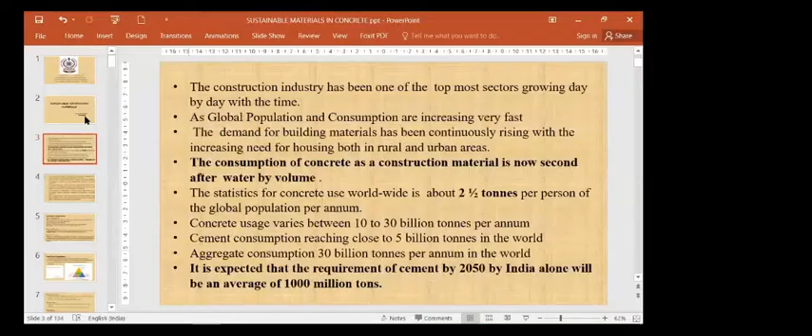As it is a very vast material, to discuss this we need a lot of time, because we cannot brief it out in 1.5 hours. So anyhow, I have tried to compromise the materials with few materials where I can just bring out the experimental data conducted in our college and outside also. So with the support of the experimental data, I'll be explaining the utility of these materials.

So the construction industry, all of us know, is one of the sectors growing day by day, and the global population and consumption is also increasing along with the construction. As the construction industry is growing, population consumption is also increasing. So demand for the materials definitely will be higher. So the demand for building materials has been continuously rising. Construction material now has occupied second place after water by volume.

The statistics for concrete is 2.5 tons per annum as per the global population. Then concrete usage is 10 to 30 billion tons per annum. And cement consumption is 5 billion tons in the world. And aggregate consumption is 30 billion tons per annum in the world. So by 2050, it is estimated that India alone requires 1,000 million tons of cement, which is a very huge requirement.

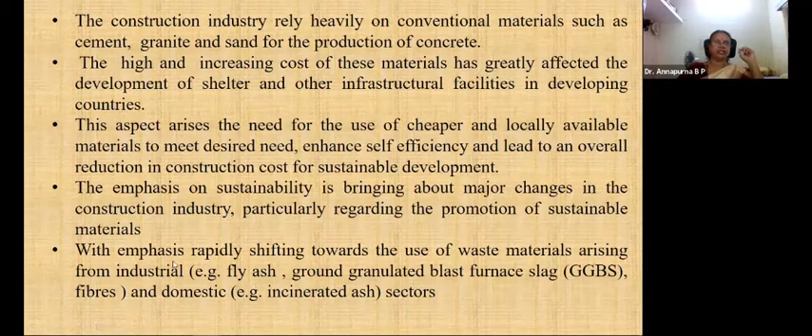The emphasis on sustainability is bringing about major changes in the construction industry, particularly regarding the promotion of sustainable materials. So importance is given towards the use of waste materials arising from the industries and domestic sectors, like fly ash, ground granulated blast furnace slag, or fibers, or incinerated ashes like rice husk ash or bagasse ash, or many other types of ashes like bamboo ash. So I'll be discussing few of these materials in the coming lectures.

Next, definition of sustainability. Many of us have already discussed the definition of sustainability, so here also I am discussing a few of them. Sustainable development is development that meets the needs of present without compromising the ability of future generations to meet their own needs. So there should be some materials left for the future generations also. And manage economic growth in such a way as not to do irreparable damage to environment.

Sustainable construction: creating and operating a healthy built environment based on resource efficiency and ecological design. Coming over to the materials used throughout our consumer and industrial economy that can be produced in required volumes without depleting non-renewable resources and without disrupting the established steady-state equilibrium of the environment and key natural resource systems.

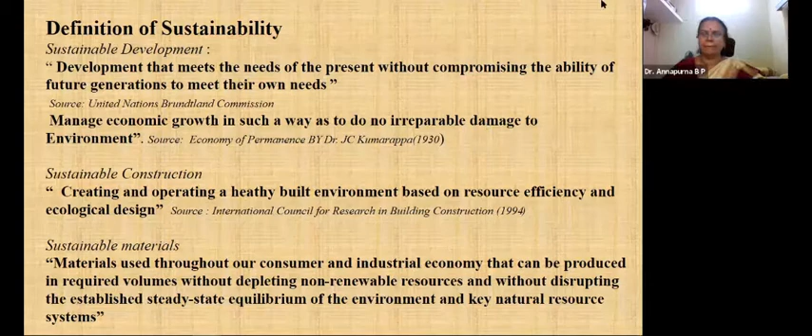Now, the three pillars of sustainability. Many have discussed these pillars of sustainability. Sustainability is dependent on these pillars: environment, economy, and society. This can also be discussed as 3P, that's planet, people, profit. Planet refers to environment, people refers to society, profit refers to economy. And it can also be said as the 3 E's: environment, equity, and economy.

Now, environmental impact. Cement manufacturing accounts for about 5% of carbon dioxide emission in the world. This attributes to 1/20th part of carbon dioxide emission of the world. So increase in carbon dioxide leads to global warming and climatic change, which is the environmental effect which has to be addressed.

Then, economic impact. Construction provides livelihood to a large extent of the population, next to agriculture. Poor construction with concrete can lead to high repair and rehabilitation cost. So construction gives employment to many people, and also when the construction is very poor, for repair and rehabilitation we have to spend a lot on that. So we have to take care of both the things.

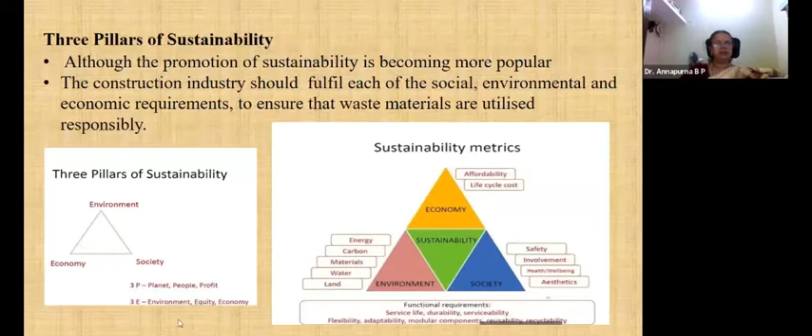Now, sustainable construction materials. The list of sustainable construction materials that can be aimed at the concrete industry has increased noticeably. This will continue as the pressure increases on the construction industry to reduce its carbon footprint. It is estimated that at present there are 10 to 20 billion tons of waste that can be potentially processed for use. Some of the sustainable alternative materials in concrete are alternative materials to cement.

We can use fly ash, rice husk ash, bagasse ash, bamboo ash, banana ash, and many other ashes. Most of the agricultural waste ashes are being used, and material research is going on for alternate materials to cement.

And materials to replace aggregate: we know that slag, iron ore tailings, and waste metal from windmills can also be used as replacement for the aggregate. Then recycled aggregate, copper slag, waste glass aggregates, and waste plastic aggregates. Coffee seed husk is also being used, and research on this is going on.

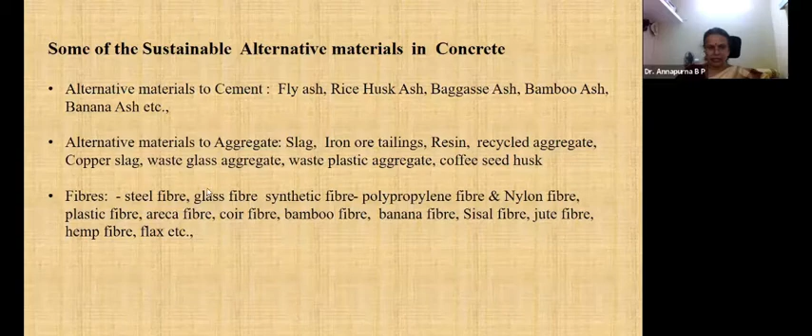Then fibers: steel fiber, glass fiber, synthetic fiber, polypropylene fiber, nylon fiber, plastic, areca, coir fiber, bamboo fiber, banana, sisal, jute fiber, hemp fiber, flax, etc. These are the fibers which we use. These fibers will increase the flexural strength or the crack arresting in the concrete.

Then alternative materials to aggregates. Now let us discuss some of the alternative materials to aggregates. For this, we have the preparation of a mineral planning. We have to have a mineral planning policy in line with the advanced countries. Mineral planning is essential for a judicious use of natural resources.

The government of the UK, after consultation with industry and other interested bodies, published the aim for the aggregate industry as Minerals Planning Guidance 6. The guide outlines the general policy and guidance to mineral planning authorities and operators on how to ensure a steady and adequate supply of aggregates, both coarse and fine, keeping in mind environmental and socio-economic considerations. The objectives of sustainable development of mineral planning for England are set as follows.

To conserve minerals as far as possible, whilst ensuring an adequate supply to meet the needs of society for minerals; to minimize production of waste and to encourage efficient use of materials, including appropriate use of high quality materials and recycling of waste; to encourage sensitive working practices during mineral extraction, and to preserve or enhance the overall quality of the environment once extraction has ceased.

Then to protect areas of designated landscape or nature conservation from development, other than in exceptional circumstances where it has been demonstrated the development is in the public interest.

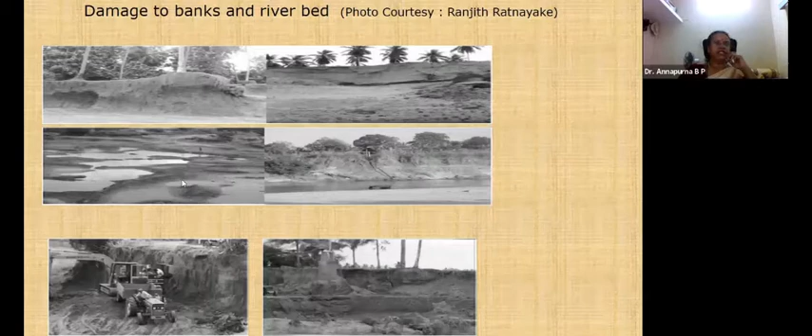So now, alternative to river sand. As there is a huge demand for sand in construction, the river sand resources are depleting. So the illegal mining of natural resources is creating a major problem, and environmentalists are protesting against mining of these natural resources, not only in India, but all over the world.

The regulating authorities, such as the National Green Tribunal, Ministry of Environment and Forest, the State Environment Impact Assessment Authority, and the pollution control boards, etc., are restraining sand mining without any license or permit or environmental clearance from the riverbeds across the country.

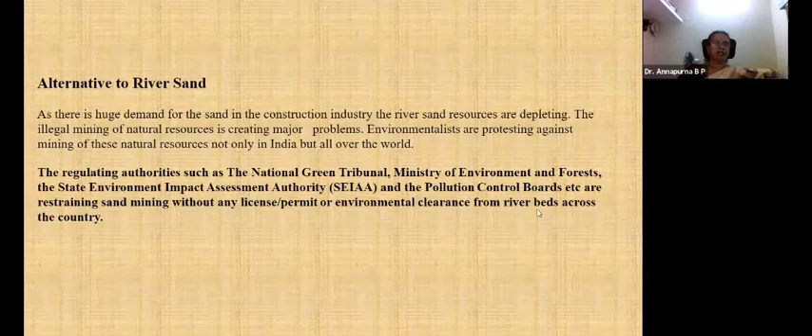Now, river sand substitutes. There are many materials which can be substituted for river sand: processed rock fines, offshore sand, dune sand, wash soil, fly ash, iron ore tailings, slag sand, copper slag, construction demolition waste, powdered glass, aluminum, sawmill waste. Then manufactured sand. Comparison between river sand.

Now let us start with the different sand. The manufactured sand. Now all of us are using M sand, so that is manufactured sand. So let us just see the comparison between river sand, manufactured sand, crushed rock fines, and washed crushed rock fines. So the manufactured sand is the one which is produced in the crusher, the controlled

inspections. But the crushed rock fines are the rock which is being crushed, and washed crushed rock fines are crushed rock fines again washed by water so that the fines will be removed, and it will be better than the crushed rock fines. It is nearing the manufactured sand, but it is not as good as manufactured sand. So manufactured sand is produced by feeding stones of varying sizes into a vertical shaft impactor.

The machine is shown here. There are many other types of machine. This is a vertical shaft, in which the rocks are fed from the top, and then crushed. So the VSI crusher, by means of its unique design and action, produces well-shaped fine aggregate particles. The process of attrition also enables the removal of surface roughness of the fine aggregate particles to a good extent.

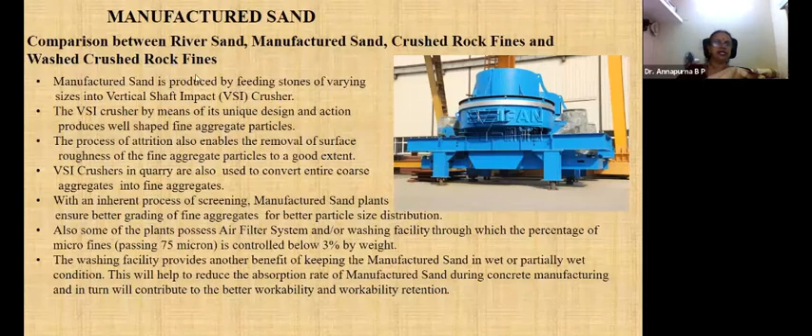Now this is the sieve analysis distribution of the fine aggregate. The first one shows the river sand, from the maximum for zone 2. So this is the maximum here. Okay, so now this is the sieve aggregate size distribution, percentage passing, for the river sand. The first figure shows river sand, and the second is the manufactured sand.

So the manufactured sand lies between these two zone 2 limits of the river sand. The distribution is very uniform, and here the fines and the larger size aggregates are balanced. But when we come to the crusher dust sample, we can see that the finer materials are higher than the zone 2 sand, and because of this the strength of the concrete reduces, because the larger size aggregates are fewer than the finer size aggregates.

So the crushed washed rock dust: by washing this, the finer aggregates can be lessened compared to the crushed rock dust. See the curve. The percent of finer aggregates is more here. By washing it, you can remove the finer aggregates to a certain extent.

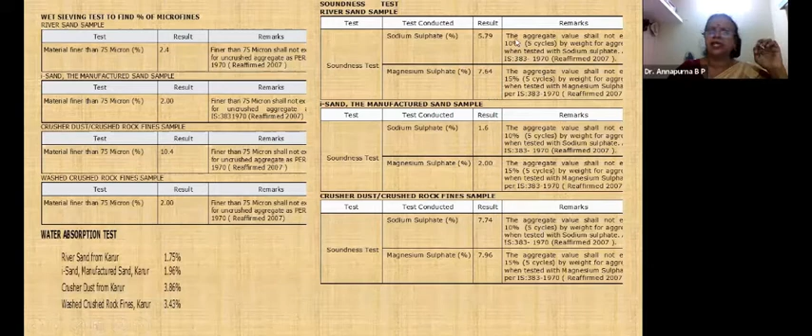This is the soundness test. When the sample is reacted with sodium sulfate or magnesium sulfate, the aggregate value should not exceed 10%. Here for river sand it is 5.79 and 7.64. For manufactured sand it is 1.6 and 2, which is lesser than the river sand.

The crusher dust or crushed rock dust fines has 7.74 and 7.96, because the dust contains more silt and it is not taken care of. So the manufactured sand has the least effect due to sodium sulfate and magnesium sulfate. All these fines are within the 10% aggregate value, but the better quality is the manufactured sand, which has the least. Now, water absorption.

River sand water absorption test: it is observed that it is 1.75% water absorption. Manufactured sand is 1.96%, crushed rock dust is 3.86, and washed crushed rock is 3.43%. These materials, river sand, manufactured sand, crushed dust, everything is taken from the Karur area. So this is the water absorption test.

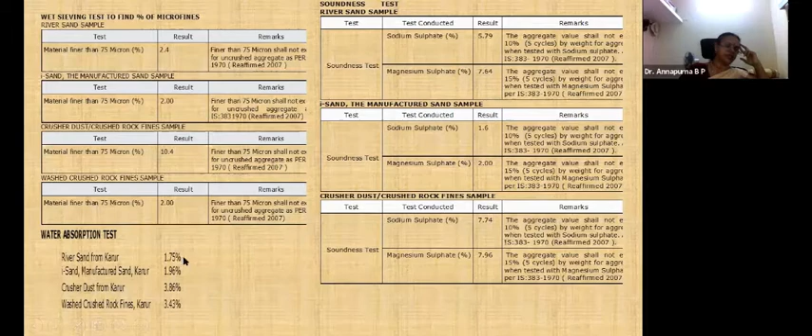According to the IS code limit, it should be less than 2%, whereas the water absorption for crushed dust and washed crushed dust is greater than 2%. Now coming to expansion, this is the ASR reaction, the time of immersion in sodium hydroxide. This is the expansion of the river sand and the manufactured sand. On immersion in sodium hydroxide, the river sand shows a higher expansion, whereas the manufactured sand shows the least expansion.

If aggregates contain reactive silica, it can react with alkali in cement during hydration and result in formation of alkali silica gel. This gel imbibes water from concrete and expands. The expansion causes disruption in concrete and makes it disintegrate or crack. Next is the accelerated mortar bar test, which we call the ASR test, one of the test methods according to the codal provision.

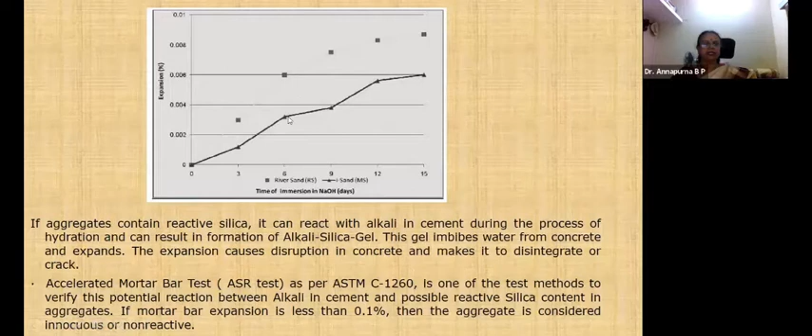This should be less than 0.1%, then the aggregate is considered non-reactive. Here both tests are less than 0.1%. Though it is less than 0.1%, the reaction on the M sand is less than the river sand. Now this is the comparison on workability and strength: river sand, M sand, crushed rock dust powder, and washed crushed rock.

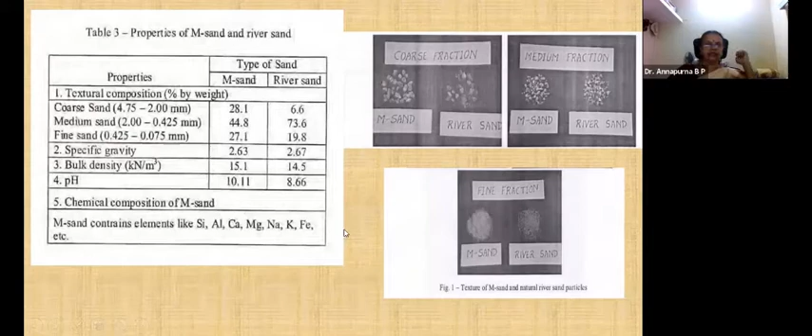And now coming over to the grain size distribution of both the M sand and river sand put together, we can just see here. These are the zones, and this is the river sand and M sand. So both lie within zone 2, but the distribution of fiber is better in M sand compared to the river sand.

And here, compressive stress: this is the stress versus strain graph. So this is for M sand and this is for river sand. So compared to the river sand, M sand has lesser strain and high strength. And the strength is similar to a high strength concrete.

The modulus of elasticity of masonry with M sand is double that of the modulus of masonry with river sand. So when we compare the modulus of masonry with M sand and with river sand, the modulus of masonry with M sand is double that of the river sand. The increase in modulus can be attributed to better bond between the mortar and the brick.

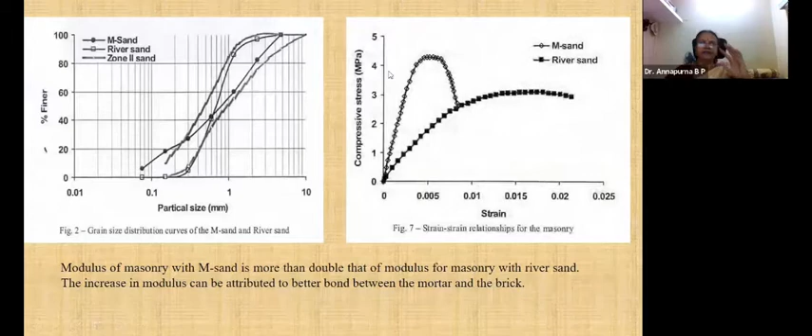Now, what is water retentivity? Water retentivity can be defined as the ability of the mortar to retain water against the suction of the brick or block. Mortar is a cementitious material, thus initially it requires a certain amount of water for the hydration process and development of strength. If the water loss from the mortar is large, this leads to a low water cement ratio in the mortar and improper hydration of the fresh mortar, thereby affecting the mortar characteristics and the bond development.

So we need to have a certain water retained in the mortar to have proper hydration in the fresh mortar. Otherwise the mortar gets dried and the strength reduces. Water retentivity values for 1:6 cement mortar using river sand and M sand are 27.3% and 28.5%. For 1:4 mortar, it is observed that it is 25.6% for M sand and 35.6% for river sand. Thus, water retentivity of mortar improves the workability of the M sand, and in turn increases the strength and bond development.

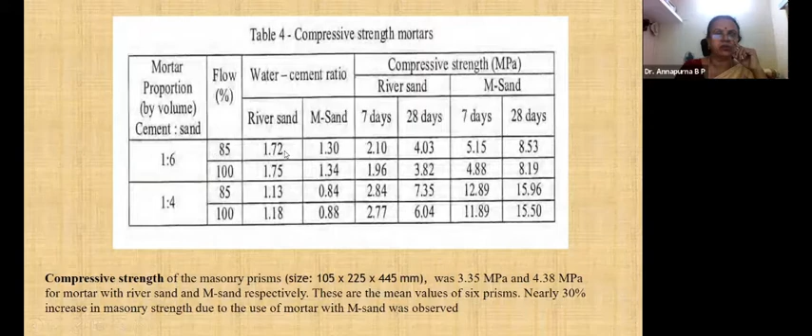Then, compressive strength of mortars. This is the strength of mortars which we have studied. For 1:6 and 1:4, the percentage flow here is 85 and 100. For river sand, at 85% flow, the water cement ratio is 1.72, whereas for M sand it is 1.3, and for 100% also it is 1.7 and 1.3. From this we can see that the water cement ratio of M sand is lesser than the river sand.

The compressive strength for river sand at 28 days is 4.03, whereas for M sand it is 8.53. And even for 1:4, it is 6.04 and 15.50 for 100% water flow, where the water cement ratio is more. For lesser water cement ratio, it shows a higher strength of 15.96 and 8.53 compared to 4.03 and 7.35 of the river sand. So nearly a 30% increase in masonry strength due to the use of mortar with M sand was observed.

Now let us go to the filtered sand. Filtered sand is where they usually extract the topsoil of the earth and then wash it, because the soil consists of a major amount, like 50 to 60%, of sand. Along with that, it has clay and silt content. So this clay and silt content has to be washed off.

So they extract the soil like this and then wash it with water and retain it. The clay and silt will settle, so you can extract the sand. By washing, the silt and clay content will be washed off, and some amount of clay will be retained, so the major amount of sand can be extracted.

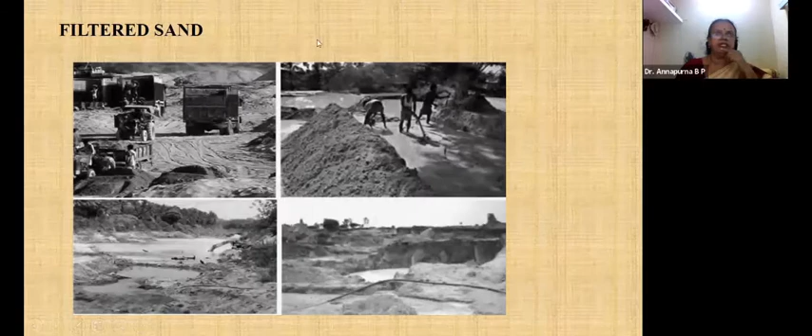The use of filtered sand for construction is increasing because of restrictions on river sand. The methods of extracting filter sand are very crude. It is extracted by manually washing the soil in pits and small ponds to remove the silt, because the natural soil contains 40 to 50% sand, and in some cases 60%.

The procedure is often criticized because it destroys topsoil, leaving ugly pits. But with proper mechanisms, extracting the topsoil can be avoided, because not only does the topsoil consist of this good sand, but the subsoil below the topsoil has an even greater proportion of sand.

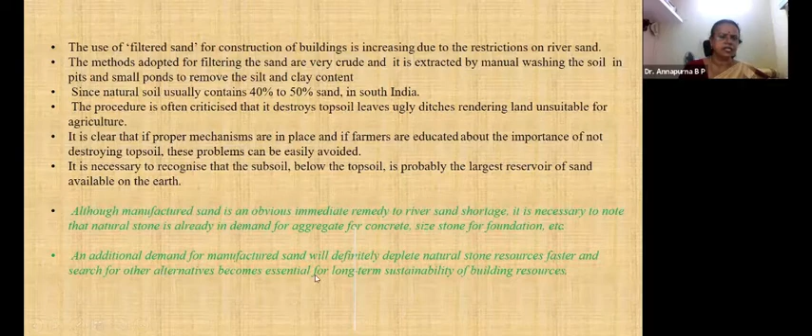Manufactured sand alone cannot be used because it is extracted from aggregate, which comes from natural stone. When natural stones get depleted, we have to go for other sources, so sand extracted from soil can be used. An additional demand for manufactured sand will deplete natural stone resources faster, making the search for alternatives essential for long-term sustainability of building.

Extracting only the topsoil will affect farmlands. So this can be done instead when we dig ponds for water harvesting, canal digging, or digging foundations for high-rise buildings. Wherever we extract soil for these purposes, that soil can be used for the extraction of sand instead of digging the topsoil.

Again, tank beds and dams store a huge quantity of silt, which also contains some amount of sand. So that can also be desilted and then used.

The clay and silt content should not be more than 1% by weight. Material finer than 75 micron should not be more than 3% by weight, so the total deleterious material for uncrushed fine aggregates should be less than 5%. The higher the percentage of clay and silt content in sand, the higher the requirement of cement will be, increasing with the presence of clay and silt content in the sand.

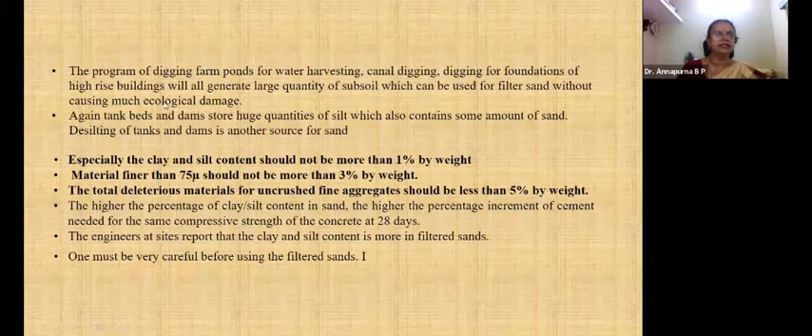Engineers at site report that the clay and silt content is more in filtered sands. One must be very careful before using filtered sands. For this, there is a research result presented here, done by Professor K.S. Chandrashekar from IISc.

This is another study where we have seen that the presence of fines lesser than 75 micron is less than 5%. That is why we are getting a higher compressive strength of the mortar.

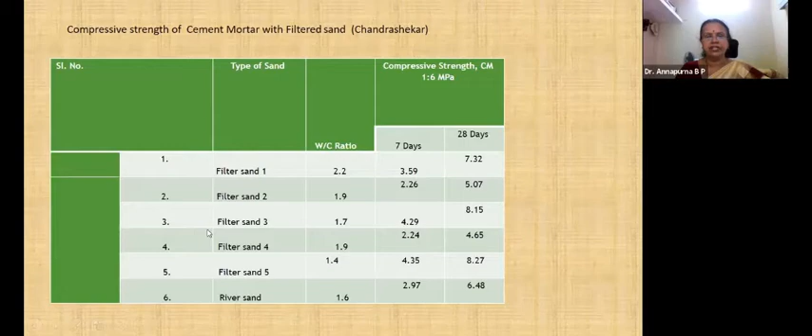But we have conducted another research with student Dhruva, testing mortar and concrete. Here, in this test, the presence of particles lesser than 75 micron size is more than 5%. So let us see the effect on the concrete.

This is the fineness modulus, which is 2.63, and here is the distribution of the aggregates and the test results. We have taken 100% sand and 0% fine filtered sand, and it is being replaced progressively.

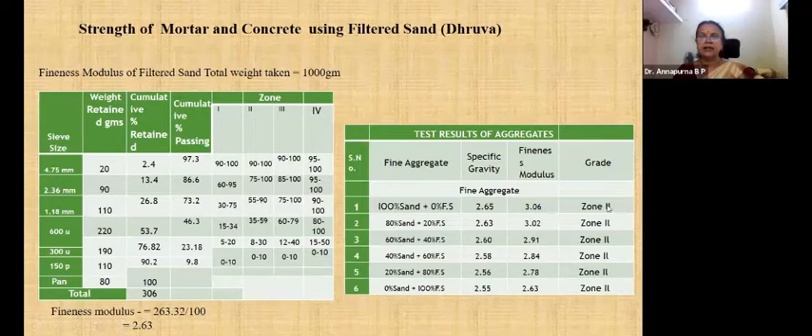The sand mixtures were tested at 80% sand/20% filtered sand, 60%/40%, 40%/60%, and finally 0% sand/100% filtered sand. The specific gravity was found for all these combinations, with 100% natural sand giving 2.65. As the sand is replaced with fine aggregate, the specific gravity reduces, along with the fineness modulus, but all these lie within zone 2.

This is the hydrometer test, done to find out the presence of finer particles in the sand. This was done with the help of Dr. Krishna sir from the Department of Civil Engineering, Bangalore University, who helped us determine the percentage of finer materials.

From this, we observe that the filtered sand contains finer materials greater than 17%, whereas the limit as per IS 383 is 3%, and for natural sand it is 1.02%. This filtered sand value of 17% is much higher than the 3% limit.

Now the compressive strength for mortar. A 1:6 mortar test was conducted, and it was found that for normal sand, the compressive strength was 12.5. With the addition of filter sand at 20, 40, 60, 80 percent, the compressive strength reduced, and for 100% filter sand, the compressive strength of the mortar was 9.1.

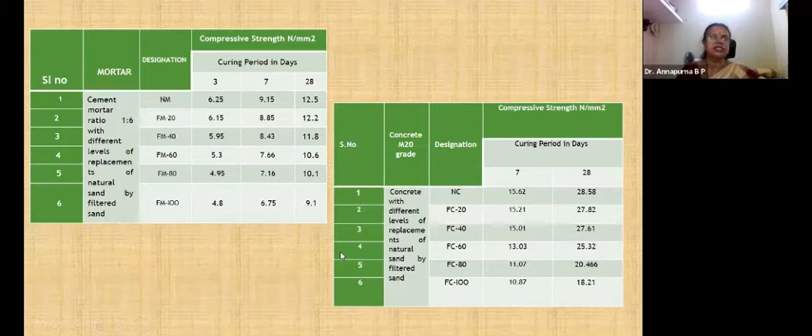Then compressive strength for concrete was tested for M20. For normal concrete, we found 28.58 for the 28-day strength. This reduced when we used filter sand: for 100% it was 18.21, for 20% it was 27.8, and for 40% it was 27.61. This indicates that the finer materials in the filtered sand affect the strength.

Now the pond ash. Pond ash is a byproduct of thermal power plants, considered a waste material whose disposal is a major environmental problem requiring a lot of disposal area. There are three types of ash produced by thermal power plants: fly ash, bottom ash, and pond ash. Fly ash is collected by mechanical and electrostatic precipitators from the flue gases of the power plant.

Bottom ash is collected from the bottom of the boilers. When these two types of ash are mixed together, they are transported in the form of slurry and stored in lagoons, which we call pond ash. Using pond ash as a replacement for aggregates, it is reported that only up to 40% of the sand replacement can be done by pond ash.

This has already been discussed by the previous teachers, so I'm not going to discuss it more here. Now coming over...

To offshore sand and sea sand. In coastal areas, where there are large coastal regions, offshore sand and sea sand extraction and use is in practice. This is how they extract it: they suck the sand from the sea offshore, and then they pile it up.

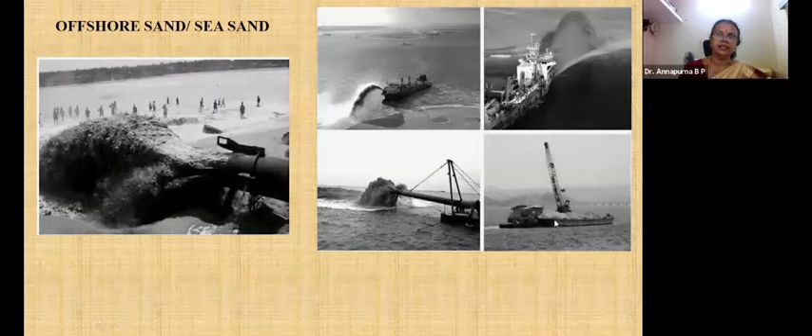They suck the sand, pile it up, and allow it to wash, or wash it if they have ample water available. If they have more water, they can wash it and remove the chloride ions in the sand, since the presence of chloride ions increases corrosion in steel.

Sea sand has a very high shale content and is finer than river sand. Generally, in concrete, coarse sand is more suitable, but river and sea sand have more finer particles. Due to shortage of sand in coastal areas, properly washed and clean sea sand can be used for making concrete, if ample water is available to wash the sand and lower chloride content.

This chloride content can also be reduced by adding fly ash in desired proportions, so that we can balance the chloride ions. This in turn will reduce the corrosion in steel.

Treating sea sand is very costly and requires a large area. As Chan Chi-Ming, head of the Department at the Institute of Vocational Education, says, treating sand is very costly and requires a large area to soak it in fresh water. A professional from Hong Kong says no developer would risk using sea sand if it is not treated well, as the concrete will peel off the building after 10 years.

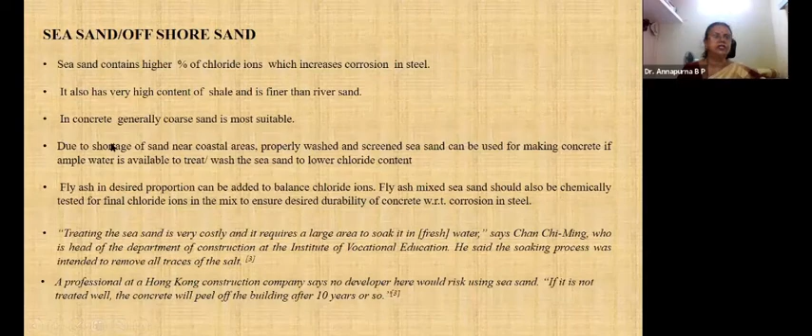The Sri Lanka Land Reclamation Development Corporation Association, the Civil Engineering Department of the University of Moratuwa, and the National Building Research Organization have carried out some studies and recommended sea sand as a sustainable alternative to river sand.

The studies show that the salinity level in the sea sand extracted from the offshore sea is very much less than the sand at the beach. The sand has been pumped from a distance of about 10 kilometers, so the offshore sea will be extracted where it is 10 kilometers from the beach. This contains lesser salinity level compared to the sand at the beach.

This sand will be stockpiled and left, for a period of nearly 8 years, for the monsoonal rains. Due to this, they claim that the salinity has been washed away. By piling the stockpiles and allowing it to expose to the monsoonal rains, they say that the salinity is lost in the sand, so it can be used.

Before recommending sea sand as an alternative, sand samples must be studied in the laboratory to determine the components and fineness modulus of sea sand grains, unit volume of sand, that is how much sand is present, content of mica in the sand, content of dust, mud, clay, volume of foam, sea salt in the sand, and the content of shale in sea sand.

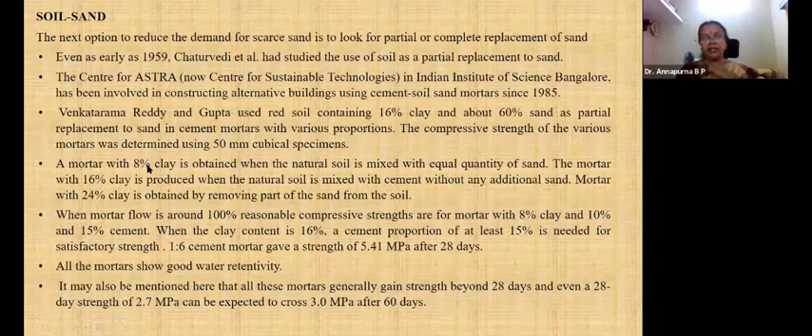For this, they have reduced that clay to 8% from 16% by removing the clay content from the soil and adding the quantity of sand. So they reduced the clay content from 16% to 8% clay by adding additional sand. So this is one specimen they have taken.

The other specimen uses 16% clay itself, where they have not added any additional sand to it. The other one has 24% clay. To make 24% clay present in the sand, they have to remove part of the sand from the soil, so then only they can have 24% clay in the soil. So these are the three specimens they have taken with different percentages of clay.

For this, they have tested the mortar flow, testing for the cement mortar. By having the mortar flow at 100%, the compressive strength for 8% clay was taken, and they have stabilized this, modifying it with 10% and 15% cement added to that, and then that is being used here.

So again, when the clay content is 16%, a 15% cement proportion is needed. So when you have 16% clay, you have to add 15% cement to get a very good strength. So this is the mortar; they have taken 1:6 cement mortar, where they have achieved 5.4 megapascal after 28 days. So all the mortars here showed good water retentivity because of the presence of the finer particles and clay content. It is also mentioned here that all these mortars generally gain strength between 28 days and more than 28 days. So you have to wait for more than 28 days to achieve a greater strength.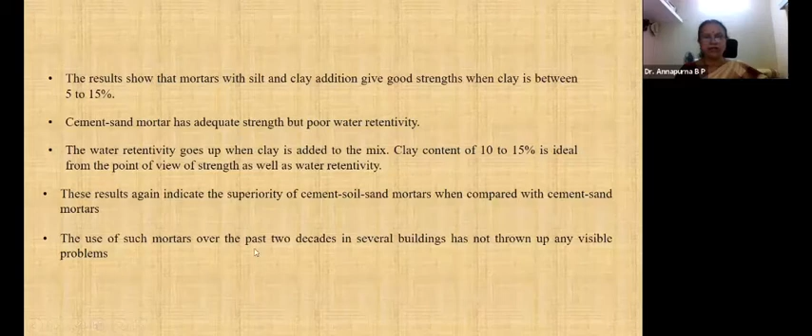Now coming to iron ore tailings as a partial replacement to sand in mortar and concrete. So this is the extraction of iron ore from the iron factory. So factories processing iron ore generally leave behind large quantities of tailings.

This is being disposed in landfills, quarries, ponds and sea as waste. The Kudremukh Iron Company has a storage of 200 million tons of iron ore tailings. This is collected in Lakya Dam in Chikmagalur district, which causes some serious environmental problems. So one way to discard this IOT is to use them in the building industry, where they are recycled and reused for renewable and sustainable product development.

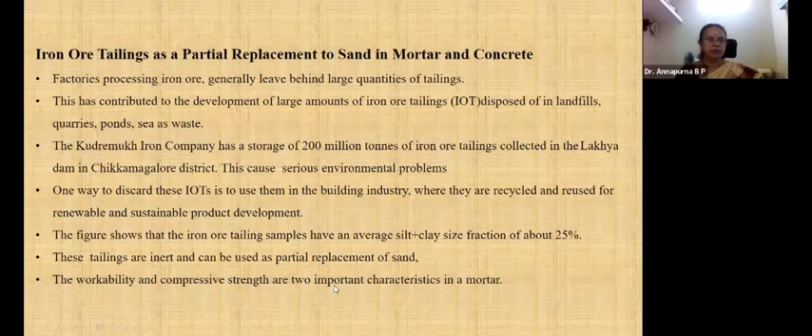The figure shows that the iron ore tailing samples have an average silt clay size fraction of about 25%. These tailings are inert and can be used as a partial replacement. So here, it consists of an average silt plus clay size fraction of about 25%. Then the workability and compression, that we will be checking here.

Now for a test here, they have taken the Kudremukh iron ore tailings mixed with sand in various proportions, tested for flow characteristics. The iron ore tailings with a water binder ratio of 1:1:6. They have taken cement lime mortar. Sand replacement of 25% and 50% shows a satisfactory flow, and the composition for cement lime was determined for a

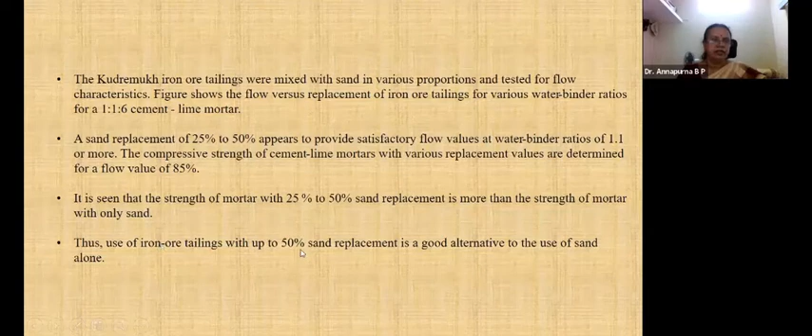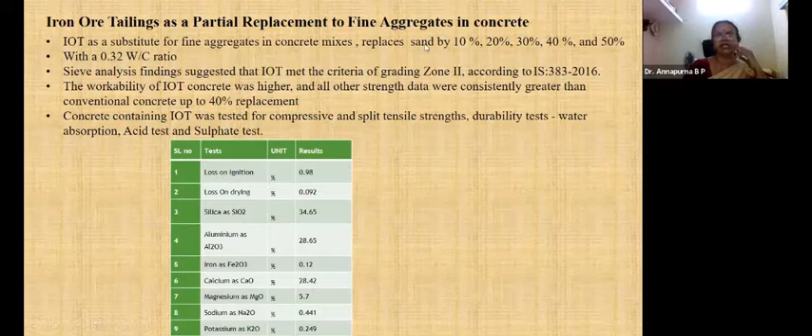Now this is iron ore tailings as a partial replacement of fine aggregates in concrete. This is the work done by one of our researchers, I have not mentioned the name here. So much research is going on in the department. Here the sand in concrete mixes is replaced by 10, 20, 30, 40, 50%, retaining a water cement ratio of 0.32 to achieve a high strength concrete. Sieve analysis was done, and the workability of concrete was higher. All of the data were greater than the conventional concrete up to 40%.

So concrete containing IOT was tested. This is the test report of the IOT used for the test. This IOT contains silica 34.65, alumina 28.65, iron 0.12, calcium oxide 28.42, magnesium 5.7, sodium 0.44, and potassium oxide 0.249. Loss on ignition is 0.98, and loss on drying is 0.092.

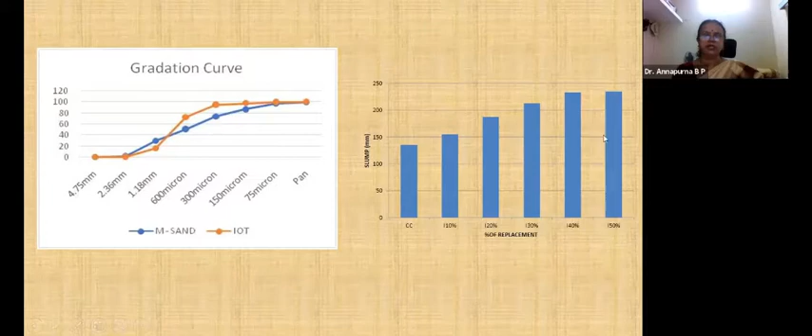This is the gradation curve. This curve shows M sand, and this is for the IOT. IOT has finer particles, which I already showed in the previous slide. This is the gradation curve we have taken for our research. This is the slump we have found. For conventional concrete and for 10, 20, 30, 40, 50% IOT replacement, the workability increases with the presence of IOT.

When immersed in magnesium sulfate, the weight loss is 1.95 for the different percentages of IOT. So the maximum, for 50% replacement, is 4.8. For 40, it is 4.68. Up to 30%, the weight loss is very less. So here also it is the same thing. For 50%, the maximum loss is 1.95.

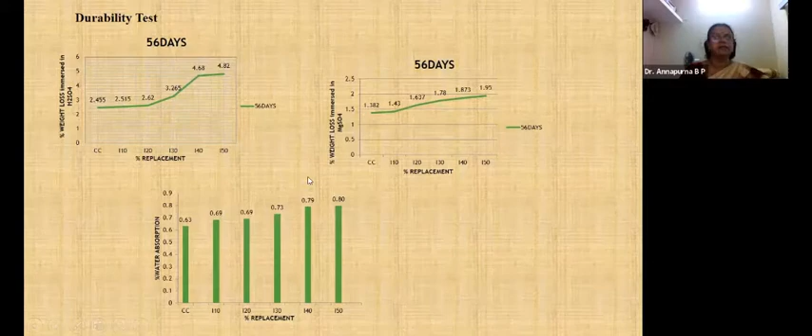So, water absorption test. The water absorption here for conventional concrete is 0.63, and for 10, 20, 30, 40, 50%, the water absorption is more. So the water reactivity is more in the presence of IOT. So this is the same explanation explained here.

And then this is granulated steel slag. This steel slag is the one which we have taken from the researcher Prasad. This is where iron ore, coal and lime are used for iron making. During iron making, the slag is produced; we call it blast furnace slag. After that, the iron goes to steel making. While steel making, there will be a waste product produced, which is called steel slag. So this steel slag is also used as an alternative to river sand.

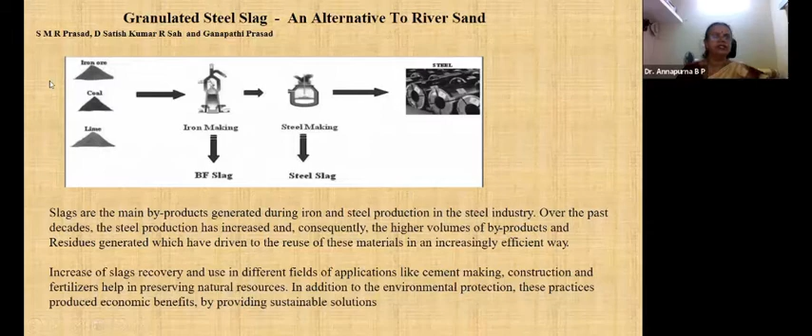Steel production has increased, and consequently higher volumes of byproducts and residues are generated, which drives the reuse of these materials. So increased slag recovery and use in different fields of application like cement making, construction and fertilizers help in preserving natural resources. Slags are generated at two different stages of steel production: iron making, blast slags. With an average of 150 to 200 kg of slag generated per ton of steel produced.

The steel slag is also called LD slag, and it contains calcium oxide, silica, calcium, free calcium oxide, and magnesium. These are the reactive minerals present in it. Unlike blast furnace slag, steel slag shows volumetric instability, mainly due to the presence of free magnesium oxide and lime. Because of these two, there is an increase in volume. In the presence of water, these compounds hydrate expansively. The swelling nature of steel slag is detrimental to almost all civil engineering applications.

Hence, the main purpose of treating slag is to decrease the volume instability; reducing magnesium oxide and lime is the main criteria. Techniques used to minimize this undesirable volumetric instability include using additives, steam treatment, and aging. Aging or weathering of steel slag refers to open air stockpiling to provide adequate exposure to moisture. This reduces the content responsible for volumetric expansion. It is a very slow process and not feasible for large integrated steel units.

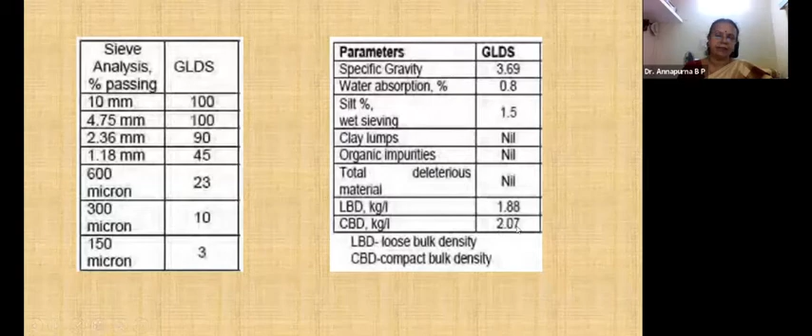This is specific gravity 3.69, water absorption 0.8, silt 1.5, and the clay content is nil. And the LBD, that is loose bulk density, when they tested, is 1.88, and compact bulk density was 2.07. Now here they have replaced this steel slag with different percentages, 0, 25, 50, 75, and 100. And it is seen that the strength for 0% is 35.2, but with presence of 25, 50, 75, and 100% steel slag, it shows an increase in compressive strength.

So granulated steel slag is an ideal example to convert a waste into a useful product which can help in conserving the river sand. They show it can be replaced up to 75%. That depends on the presence of magnesium oxide and calcium oxide, and how fine or how coarse the materials are. So by removing that, you can see the increase in the compressive strength. Next is copper slag.

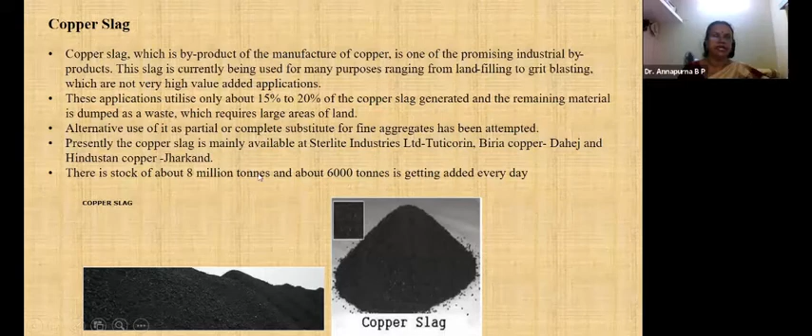Copper slag is the byproduct of the manufacture of copper. This slag is currently being used for many purposes. These applications use only about 15% to 20% of the copper slag generated. The remaining material is dumped as a waste. So alternate use of it as a partial or complete substitute has been attempted. Presently, copper slag is mainly available from Sterlite Industries, Birla Copper at Dahej, and Hindustan Copper in Jharkhand. There's a stock of 8 million tons, and about 6,000 tons is getting added every day. So there's 8 million tons of copper slag which we can use as an alternate for sand.

So here they have done it with different percentages of copper slag. Let me just take only the first specimen here and show it to you. The control specimen is 100% sand, the second one they have taken 25% copper slag and 75% sand. Then 50% copper slag and 50% sand, 75% copper slag and 25% sand, and 100% copper slag. So let me just discuss this.

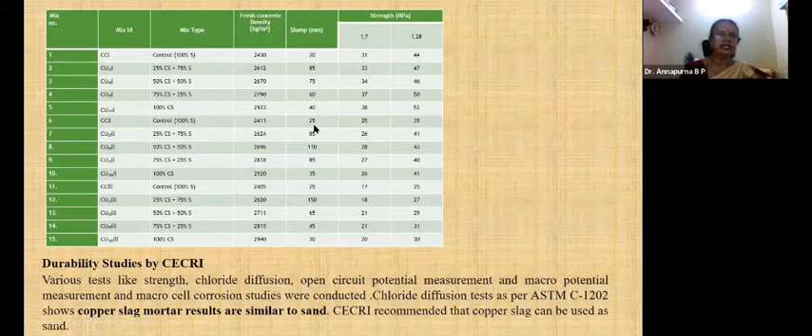Here we see that the slump is 20, but with the addition of copper slag, the workability has increased: 85, 75, 60, 40. I don't know why it is reduced here. So everywhere with only 100% slag the workability is reduced, but with the addition of sand it shows an increase in workability. The strength for control concrete is 44, but with the addition of copper slag it is increasing: 47, 46, 50, and with 100% copper slag it is 52.

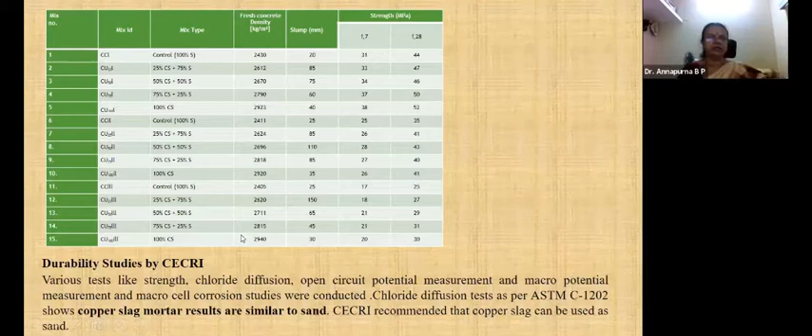Next, for copper slag, they have done a durability test, and the chloride diffusion test as per ASTM C1202 shows copper slag mortar results are similar to sand. So this can be recommended as a replacement for sand. Now, construction and demolition waste as fine aggregates. This is the C&D waste, which is now in process.

So in India we are getting about 12 to 14.7 million tons per annum. The Central Pollution Control Board estimates the current quantum of solid waste generation in India to be 48 million tons, out of which 12 to 14.7 million tons is from the construction industry.

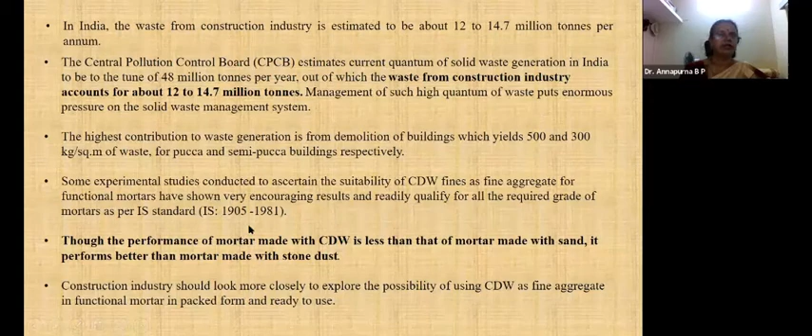C&D waste has tremendous potential for recycling, producing building materials and building products. The CIDCO Yuva Building Center in Navi Mumbai has successfully demonstrated production of building blocks and interlocking pavers using demolition waste. Now this brick masonry, when it is demolished, contains 60% of brick and 40% of mortar and plaster. This is the waste from the brick masonry.

After crushing, this mortar and plaster will have both aggregate and fine aggregate. The fine aggregate obtained from this mortar and plaster can be used as a surki pozzolana, because reacted lime content is present in the mortar and plaster. So this fine is actually surki pozzolana, which has the property of forming cementitious compounds when reacted with lime.

The crushed brick masonry waste below 4 mm is now used to replace sand in various proportions, and 1:6 cement mortars are prepared and tested. So a test is being done for 1:6 cement mortar using the C&D waste, with 5 centimeter cubes cast and then tested.

There is a test report also where the 3 days, 7 days, and 28 days compressive strength is tested, and it is seen that with the increase in percent of plastic pieces, the compressive strength is reduced, but the reduction is very less when compared to conventional concrete. This is due to the reduced bonding between the concrete materials.

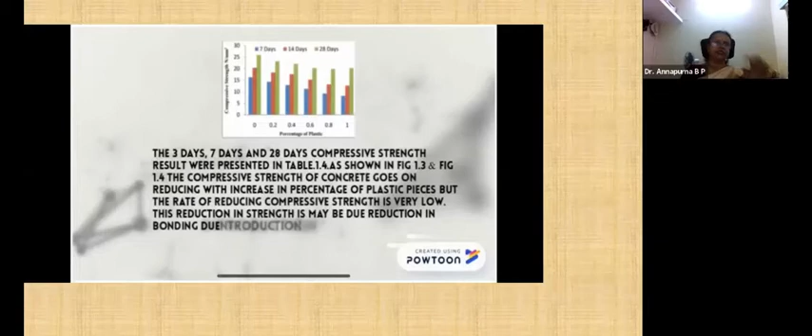So it creates a lighter weight mix. Standard weight concrete weighs 145 pounds, whereas these plastic blocks weigh 90 pounds. Simple conversion of waste plastic through a process of shredding and extrusion and adding fillers such as gypsum creates a perfect super lightweight aggregate. Adding fillers like gypsum will improve the strength of the concrete.

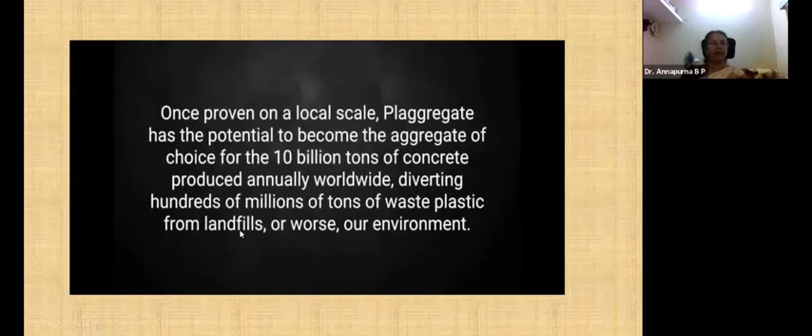Converting readily available waste plastic into super lightweight aggregate could reduce carbon emissions up to 66%. And even if we only replace our own use of expanded shale with Plaggregate, more than 70 tons of waste plastic would be diverted from landfills. Once proven on a local scale, Plaggregate has the potential to become the aggregate of choice for the 10 billion tons of concrete produced annually worldwide, diverting hundreds of millions of tons of waste plastic from landfills or worse.

Next is wood. This is concrete made from wood. This is plain wood. It still retains many advantages over more industrial building materials like concrete. As the trees absorb carbon dioxide, the embodied carbon can be lessened. And this is Ferrock. Ferrock is a recycled material. Steel dust from the steel industries is used and made into a concrete. This is a concrete block made of Ferrock, and it can be used as construction blocks.

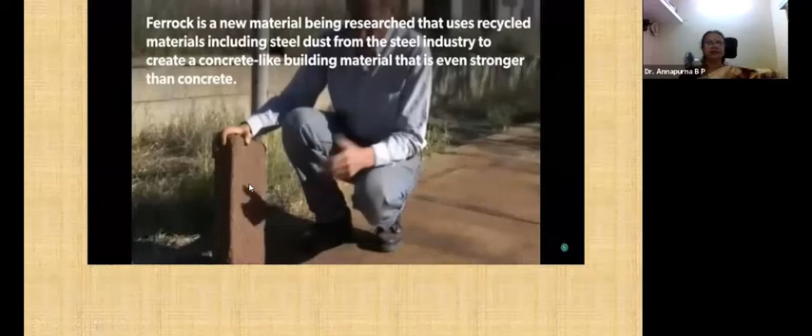Then this is AshCrete. These are blocks made from fly ash. 97% of traditional concrete can be replaced by this fly ash, and it is lighter also. And Timbercrete. Timbercrete is an interesting building material made of sawdust and concrete mixed together. Since it is lighter than concrete, it reduces transportation emissions.

And thus, because it can be, a large amount of blocks can be carried at once. And the sawdust both reuses a waste product and replaces some of the energy intensive components of traditional concrete.

Then comes fiber reinforced concrete. This fiber reinforced concrete is used to improve cracks in the concrete. It's a composite material consisting of fibrous materials. This fiber can be of different shapes, circular or flat, depending on the fiber used. The key factor influencing the fiber is the aspect ratio, which is the ratio of its length to its diameter. This ratio typically ranges from 30 to 150.

There are many advantages of fiber reinforced concrete. It improves impact strength, increases tensile strength, and reduces cracking, which is the main purpose of using fiber. It also improves freeze and thaw resistance, improves mix cohesion, and improves pumpability over long distances. Cohesion improves because the fiber interlocks the elements, and it increases resistance to plastic shrinkage, minimizes steel reinforcement needs, controls crack width, and reduces segregation and bleeding.

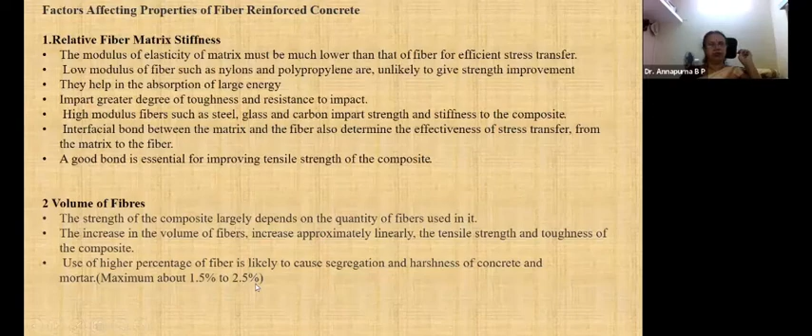Next is aspect ratio, the length to diameter ratio. It has been reported that up to an aspect ratio of 75, increasing the aspect ratio increases the ultimate concrete strength, but beyond 75, the relative strength and toughness is reduced.

Then orientation of fibers is also very important. Fibers can be randomly distributed, or distributed parallel or perpendicular to the load. It is observed that when fibers are aligned parallel to the applied load, the strength and tensile toughness are improved.

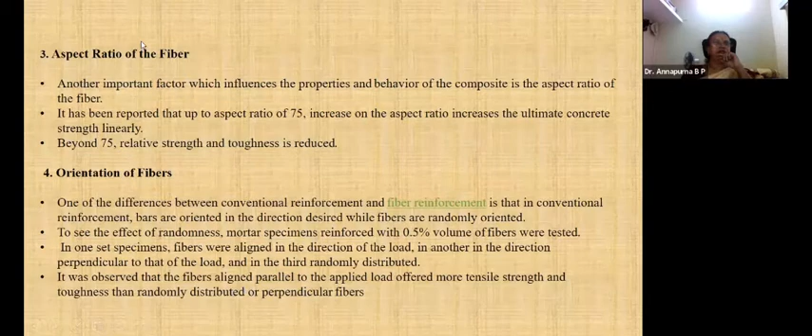Then workability and compaction of concrete depends on the presence of steel fiber and the type of steel fiber used. Increase of steel fiber decreases workability, which adversely affects the concrete mix. Another issue for workability is non-uniform distribution of fibers, since fibers are not distributed uniformly in the concrete. This also affects workability and strength because some fibers are very light and cannot be uniformly distributed.

Size of coarse aggregate also affects the performance of the concrete. The maximum size of coarse aggregate should be restricted to 10 mm to avoid an appreciable reduction in the strength of the composite, since a larger aggregate size affects the strength.

Next, mixing. Mixing of fiber needs to be done carefully, because it has to be mixed properly. Otherwise all fibers will be balled together at one point and will not be distributed all over the concrete, and it will not get good performance.

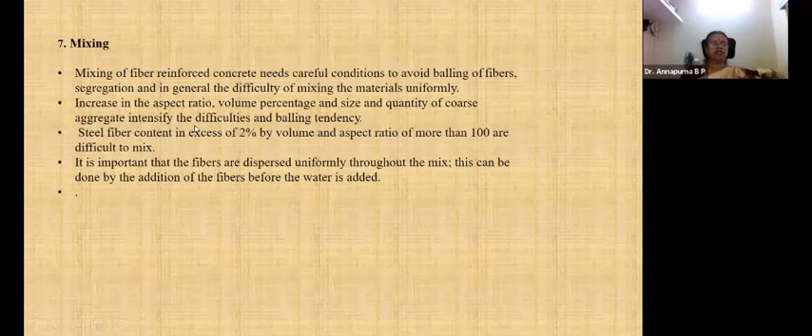Steel fiber content in excess of 2% by volume, with aspect ratio more than 100, is difficult to mix. So it is very difficult to mix if you have more than 2% steel fiber with aspect ratio of 100. Recommended aspect ratio is 75, and steel fiber content is 1.5 to 2.5% depending on the application.

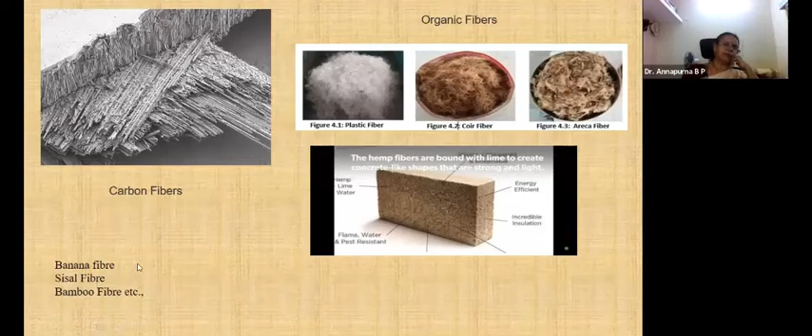So these are different fibers which I have noted down, there are some more fibers also. This is steel fiber, polypropylene fiber, GFRS, asbestos, carbon fiber, organic fibers. These are some of the figures I got, I just put it here. This is carbon fiber, plastic fiber, coir fiber, areca fiber, and organic fibers. This is another fiber, hemp fiber, which is extracted from hemp plants, where the plants produce hemp seeds, which are edible seeds. Other fibers are banana, sisal, and bamboo fiber. And here is the fiber reinforced concrete.

There is a study being done on this fiber reinforced concrete using plastic, coir, and areca fibers. These are the plastic fibers which we have extracted from the windmill waste from the production of wind blades. This is the coir fiber and this is the areca fiber. These areca fibers and plastic fibers are treated and used here, treated with sodium hydroxide and then used.

So the treated fibers will perform better than the untreated fibers. This performance is being shown here. I'll go through it quickly.

So workability here using coir fiber, areca fiber, and plastic fiber, at different percentages of fibers. The slump for conventional concrete is 74, and workability with different fibers is almost the same at lower percentages. But with increased amount of fiber, all the different fibers show lesser slump. At 3% it is least, 55, 54, whereas at 0% it is around 71, 72, 70.

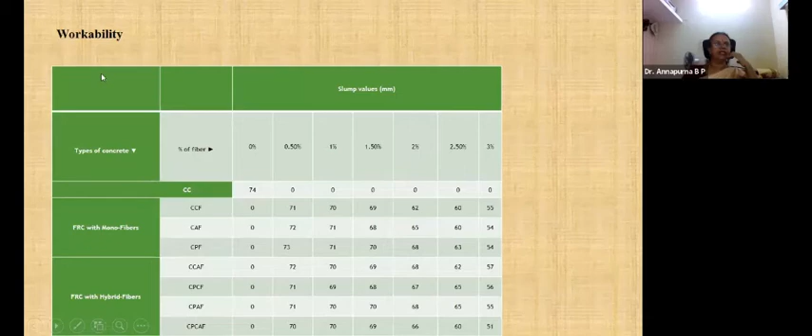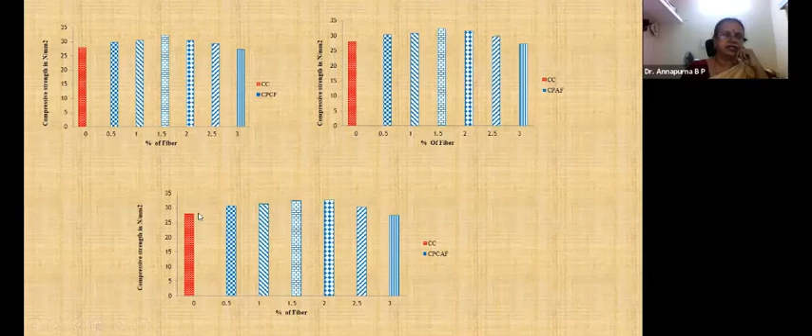Particularly when the percentage of fiber is at 1.5%, the compressive strength is increased with the presence of plastic fiber. We also worked with hybrid fiber, that is coir and areca fibers together, which performed similar to the natural fibers alone. However, the presence of plastic fiber shows an increase in compressive strength, and the combination of all three, coir, areca, and plastic, shows the maximum increase in compressive strength. This is the percentage variation.

Let me show you the compressive strength increase, which is all marginal. Percentage increase in compressive strength at 1.5% maximum was 6.1, 7.78. With plastic fiber it's 9.39 - that's why the compressive strength is higher with plastic fiber compared to coir and areca. With plastic combined with coir or areca, it is 14.75. With the combination of all three, it is showing 16.28.

Tensile strength is higher because fibers contribute to tensile strength. Conventional concrete is 13.55, whereas with the fibers it is 26.83 for the hybrid fiber. The plastic fiber alone is 20.33, and coir and areca are 13.5 and 15.81 respectively. Flexural strength also increases with the presence of fibers.

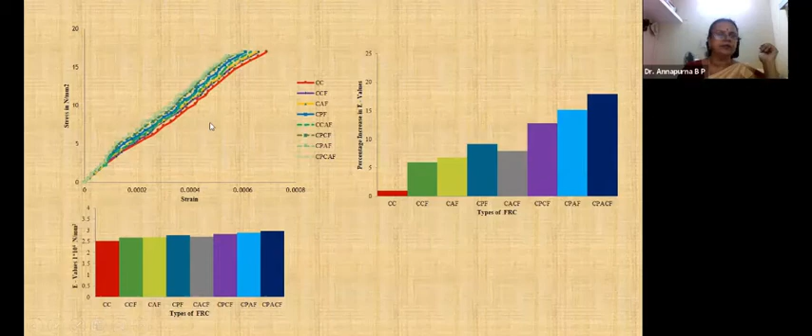So with the presence of plastic fiber and natural fibers, let's look at durability. For water absorption, with natural fibers the water absorption is more compared to conventional concrete, while plastic fiber shows less water absorption. The other fibers show similar behavior.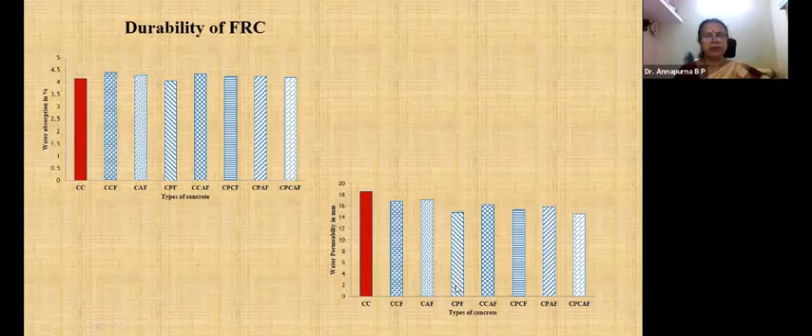This is water permeability. In conventional concrete it is more, but with fibers the permeability reduces, and in the presence of plastic fiber it reduces the maximum.

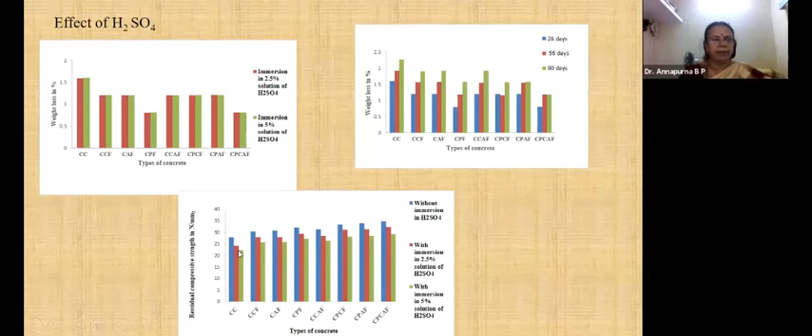This is the residual compressive strength after immersion. Sulfuric acid also shows a lesser weight loss in strength. The residual compressive strength in concrete with different fibers shows an increase, being more compared to conventional concrete. Next is the hempcrete, which I showed you.

This is the hempcrete, and these are the hemp plants, and this is a block constructed with hempcrete blocks. They are super light, which can dramatically reduce the energy used to transport the blocks. Hemp itself is a very fast growing plant, so it can be used as fiber after drying it. Next is straw bale.

This is straw which is used as a bale, then they make it into bales like this, pack it, and replace the wall with these straw bales. After placing it, they cover it with mud mortar, or it can be sealed with cement mortar. This is how it looks after it is finished.

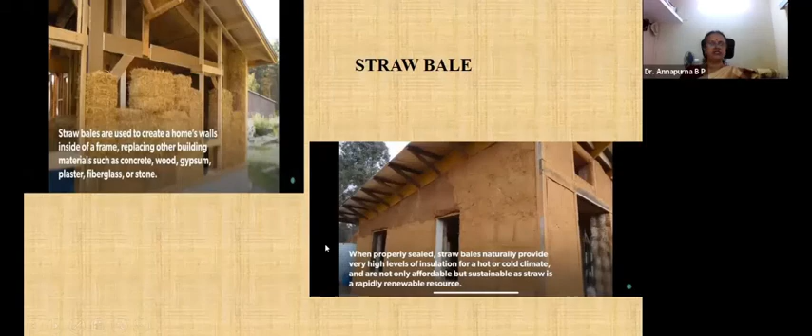And this is rammed earth. Rammed earth is where, as I told you, the soil can be directly rammed into a formwork that is being cast, and then the wall looks like this. This is the whole building which is built by rammed earth. I think this was actually discussed in the last class by Professor Raghunath, so I'm just going through it first.

This is the formwork being used, and this is the soil placed in the formwork. You tamp this soil at regular intervals, and keep tamping until it reaches the height required. Then you remove the formwork, and the wall remains like this. This is the soil construction, which is strong enough and is a very environmentally friendly element.

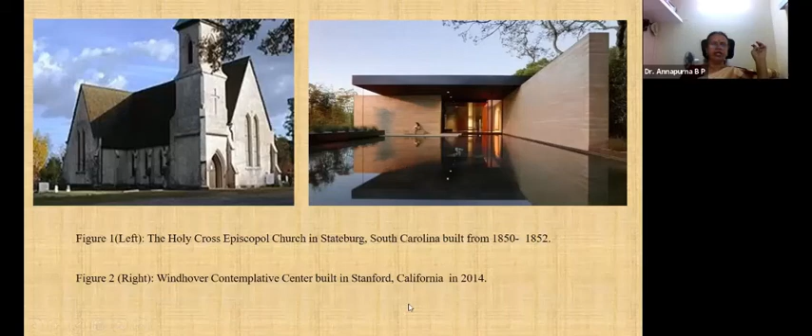This is a building, a church, built between 1850 and 1852 in South Carolina. And this is a building built recently in 2014 in California. So this is how it looks.

Now, alternatives to cement. Let's discuss a few materials, not all of them. These include fly ash, GGBS, lime, rice husk ash, bagasse ash, wood ash, and bamboo. Fly ash I'm not going to discuss since it's already been covered, so I'll discuss the other materials like rice husk ash.

Let's go with rice husk ash. It contains 20% amorphous silica. It has to be burned carefully at a controlled temperature up to 700 degrees centigrade. If the temperature is raised above that, say to 800 degrees centigrade, the material turns into crystalline form and cannot be used as a pozzolanic material, so it must be burned at a controlled temperature.

It is burnt in small pits, like 50 by 50 by 50 centimeters, also called a tube-in-basket burner, which can also be made larger. You fill this pit with rice husk and set fire at the top, then leave it for burning. After one day, everything will be burned and the ash will be left.

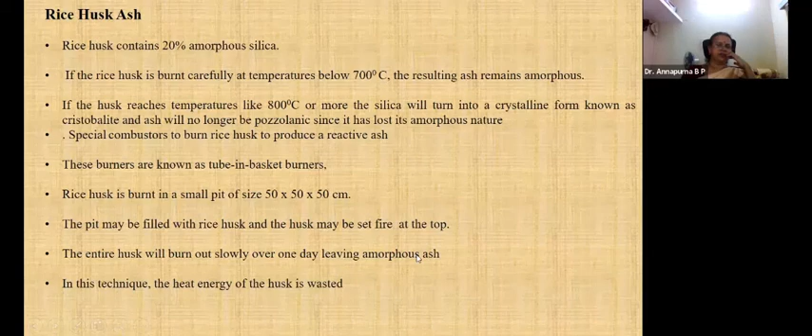So this ash can be used in the concrete. Madam. So this is a test done on the... Hello.

Sorry to interrupt you. Ma'am, we are already nearing 1:45. 1:45. So they have a quiz from 2 to 3 and we are validated at 3:30, and they have asked a number of questions. Yeah, okay. So we have discussion forum later.

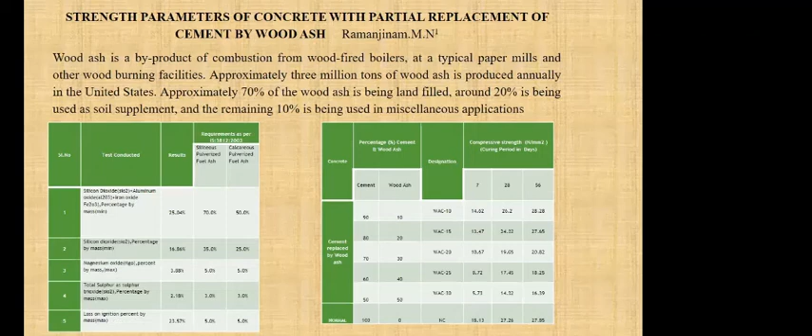In 5 minutes you can. In 10 minutes, 10 minutes? 5 minutes will be better, ma'am, because they have to go for quiz. Yes. Then I'll finish it off.

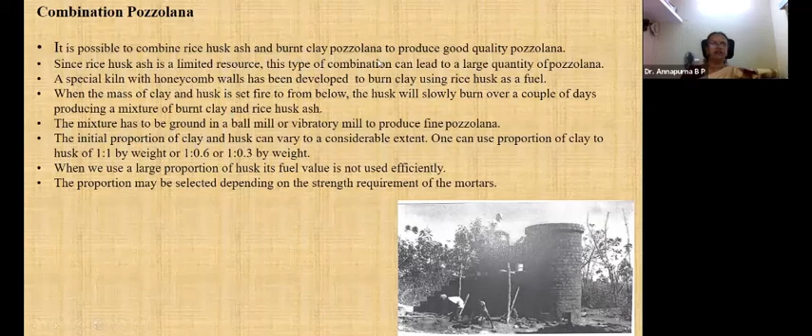Okay. I'll just tell the materials and leave it. So this is the wood ash which has been replaced, and this is a combination pozzolana. Combination pozzolana is the combination of rice husk ash and burnt clay put together. This will give you a very good strength, instead of using only rice husk ash, if it is used with a burnt clay. And this is blast furnace slag, which can be used in the cement.

This is bagasse. Bagasse is another material which comes from sugarcane ash. This also contains a good amount of silica, which can be used as a pozzolanic material. And this is a test which is done. Next is bamboo material, which can be used in cement and geopolymer as reinforcement. I have given you many experiments which have been done here, which you can go through.

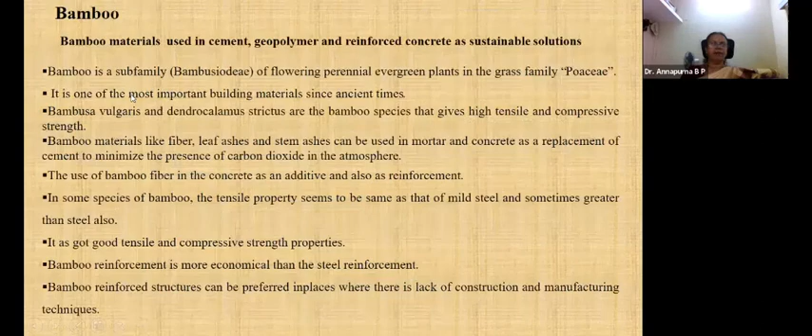In the bamboo, we can use all the materials: the bamboo stem fibers, and the ash. Bamboo leaf ash can be used, and bamboo fibers can be used as a reinforcement. So concrete with bamboo strips, then bamboo fiber can be used as an additive. Bamboo leaf ash can also be used, and bamboo stem ash also can be used. So this is the work which is being done. Stem ash. Then bamboo reinforced.

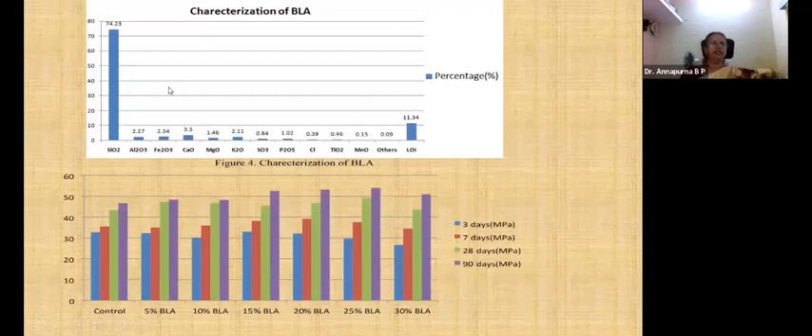Bamboo is used as a reinforcement in columns and beams, and we have got a very good result. But the only thing is we have to treat it. Otherwise, without the treatment, the bamboo reinforcement or bamboo material cannot be used. And this is another one which we have done. It's a bubble deck slab, where the slab is replaced by the balls here. These are plastic balls.

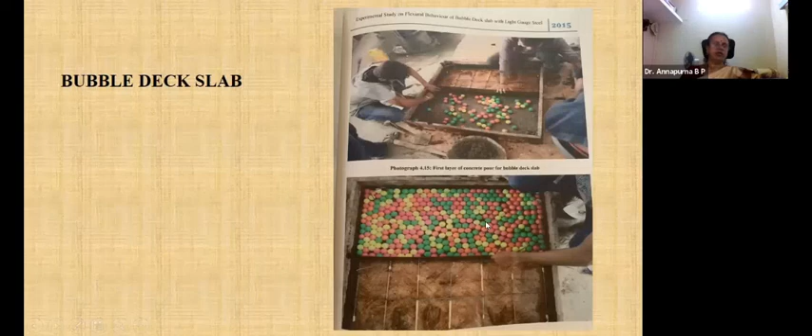Lower you put concrete, then over it you put the balls, and then over it again you put the concrete. So here the density of the concrete will reduce a lot, and compared with the conventional slab, we see that the deflection also reduces, and the ultimate load for 35 mm balls is 29.3. So for lightweight, temporary slabs, or wherever the slabs are not subjected to loads, you can use that.

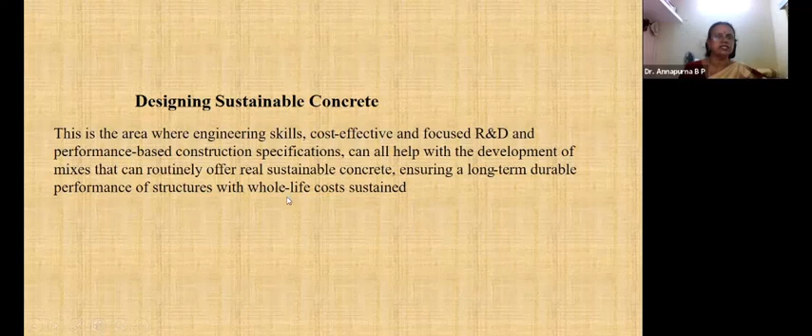In conclusion, the concrete sector has a significant role to play in the development of sustainable construction. But at the same time, the use of sustainable construction materials is potentially an attractive proposition to minimize any long-term risk to durability with concrete construction. Their use should be carefully evaluated and must not be based on strength only. In this respect, deformation properties should also be evaluated.

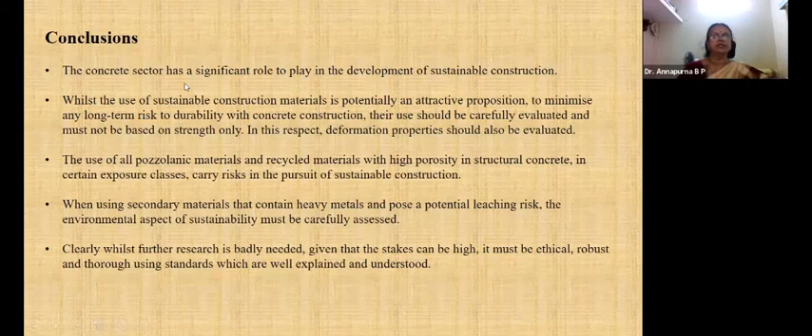So the use of pozzolanic materials and recycled materials with high porosity in structural concrete in certain exposure classes carries risks in the pursuit of sustainable construction. When using secondary materials that contain heavy metals and pose potential leaching risk, the environmental aspect of sustainability must be carefully assessed. Clearly further research is badly needed; given that the stakes can be high, it must be ethically robust, using standards which are well explained and understood. So this has to be taken care of when we are using sustainable construction.